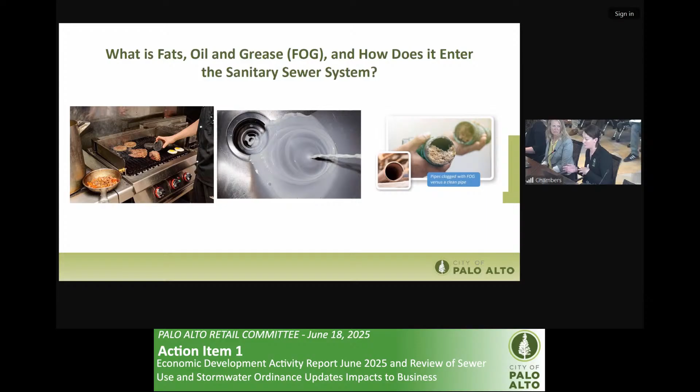Okay, so why do we care and how do we manage it? We care, first and foremost, for the businesses—FOG can really cause backups, it can corrode pipes, it's a very corrosive material when it sits for a while, and it can interrupt business by causing those backups. You might have your toilets overflow, you have to call the plumber, it smells bad—you don't want to experience that. So we're trying to help mitigate that.

Again, if it makes its way out into the city right of way through a sanitary sewer overflow, or if those waste oil bins have drippings, it can be a public health problem and a public nuisance, and it can also attract rodents. So we're trying to address those issues and concerns of the businesses and residents. Bigger picture, those sanitary sewer overflows can make their way into our storm drain system, which goes untreated to our creeks and bay, and can cause damage to aquatic life if not managed. And again, we have Bay Area regional stormwater and wastewater permits that we have to comply with as well.

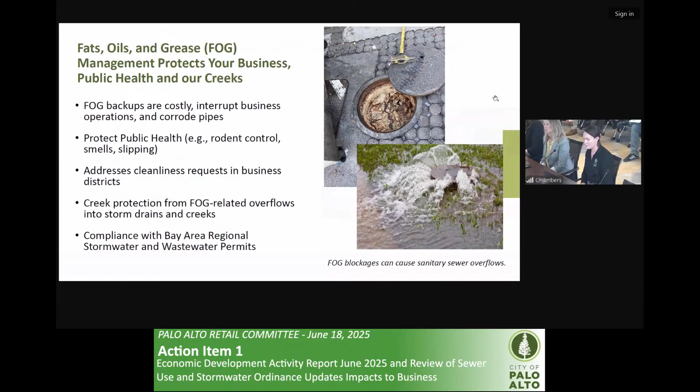So I'm going to briefly go over some major changes. There's also some minor changes. Everything can be found again at that website, and there'll be a QR code link as well for that.

So one of the major changes will be the actual grease control device, the grease interceptor specifications. The first one being the construction material of those devices themselves. I mentioned before that it's a very corrosive environment, so we want them to now be constructed of things like polyplastic, fiberglass, corrosion resistant materials.

The sizing, we want to now take into account the type of cuisine, how many meals you serve, because that affects the output of your FOG.

And then we're adding more connected fixtures, because we know through inspections, and I worked in restaurants for a long time, sometimes the hand sink isn't always used for washing hands. Sometimes the prep sink that's just for washing lettuce has meat thawing in it. So better to just have most of the fixtures in the kitchen, the prep, and some of the service area just connected.

And then Julie had mentioned the waste fryer oil secondary containment. That's going to be applicable to all restaurants, and I have an extra slide on that in just a few minutes. So we'll go over that in just a minute.

And so we realize that some of these specifications will be harder for certain restaurants. Each place has different needs. And so we have developed an alternate means and methods section where we're just coming up with alternate compliance options and trying to get creative and think outside the box and help businesses come into compliance with these new requirements.

Okay, so who will this affect? So some of these are obvious. A restaurant that's new, it doesn't have a grease control device, they're going to have to follow all of these new requirements. If there's a kitchen remodel, if you're expanding, you're taking over the extra space, maybe you're adding a bar that has a service area, you're serving food there, that may trigger some of the new requirements.

If your grease control device isn't operating properly, we see holes in these things, we see missing parts, things just aren't repairable, then you may be subject to change for that. Or if you're consistently contributing to backups in either your own building or the street itself, the city right of way. But as Julie mentioned, if none of these things apply to you, then you likely will not be affected by any of these changes.

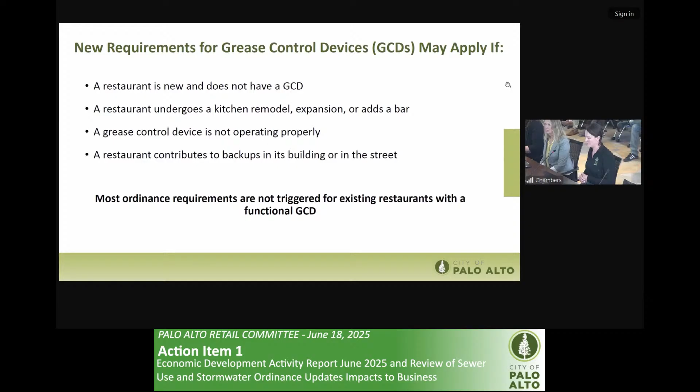We can go to the next slide.

So this is about secondary requirements for those waste fryer oil bins that are stored outside. We have a proposed effective date of January 1st, 2026. We've partnered with the fire department. They have some of their own concerns, and we have our stormwater concerns and public health concerns.

And so we would like for these bins to be stored in some kind of secondary containment. We understand that there's space restrictions in a lot of these areas, so we're going to do a lot of outreach. I've been researching a lot of different types of containment and still working with the fire department to sort of get the details on what is acceptable as secondary containment.

And what I'm finding from my research is that typically it's going to cost in the $1,000 range. It could be a little less, could be a little bit more, but that's about the range that we're finding. And again, we're trying to address concerns from residents and from other businesses, about you've all seen the back alleys at some of these places. They can be very messy, and it attracts rodents. So we're trying to address those concerns while also addressing fire, addressing their concerns, and we're addressing our stormwater concerns as well.

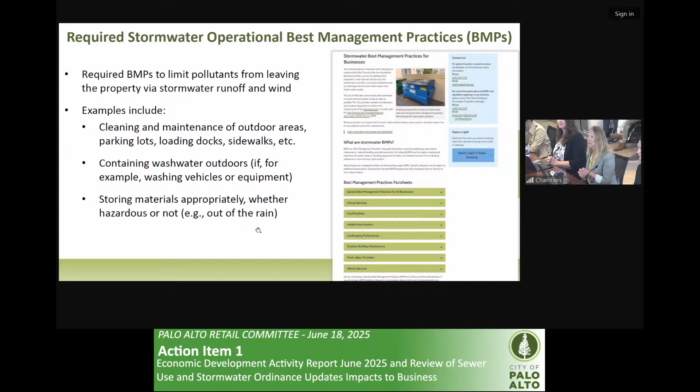So, next steps: we are asking businesses and restaurants to let us know by July 15th if they have questions or comments. We would bring all of this feedback from our business community to you in our staff report when we bring the proposed ordinance changes for all 4 new sections of the ordinance later this summer. Of course, there are 2 readings for ordinances. After the ordinance is adopted, we would do another round of extensive outreach to make sure our community knows about these changes. Ultimately, our job is just to help keep our local creeks and the bay safe, and also protect human health. We're really looking forward to getting these new ordinance requirements adopted. So thank you.

If I could just comment to connect the presentation you just received, and really appreciate the work our Public Works staff has been doing - connecting this item to your discussion last night, in particular on outdoor dining. When I spoke to unintended consequences and things people really don't want to think about when they're enjoying the activation of our car-free streets, this is a perfect example of that, where, as noted, these are important issues to the health, sanitation, and providing a safe environment for our community.

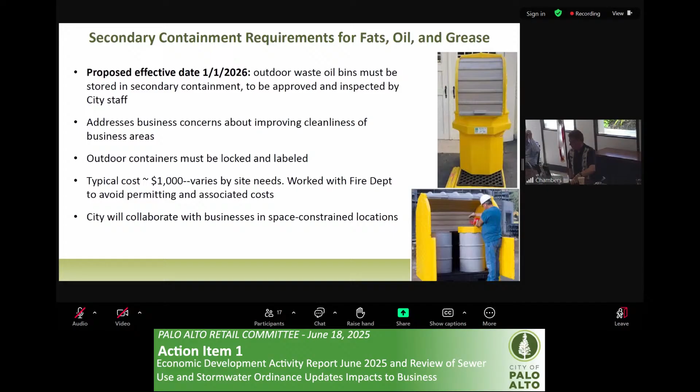Sure, so I'm referring to the alleyways where there needs to be access for emergency vehicles or just regular vehicles. There's already dumpster bins, waste oil bins, cars parking, so kind of considering that those are space constrained. And if we're adding secondary containment, it's going to increase the footprint of that waste oil bin, so we need to think outside the box in those situations.

That'll be a lot of me going out and physically looking, bringing a tape measure and working with the fire department to also make sure that we are in compliance with their regulations, and then working with the businesses. So like Lot A over here, and especially downtown, it's more space constrained, so we're going to have to figure out creative ways to meet this requirement.

And so what happens if there's not enough room? Then what kind of creative ways do you use? So things like putting awnings that are coming out from the building themselves. So instead of having a freestanding device like the one pictured, you might keep it where it is already, but have an awning come out to cover that.

They even make really heavy duty tarps that are fitted to the waste oil bin itself that'll help with stormwater runoff and things like that. So there's a lot of things on the market where it would only increase the footprint by a few inches, and I think that could work in a lot of cases. Or possibly seeing if some of these restaurants can bring their waste oil bins inside, or maybe have smaller waste oil bins that they can just get pumped more frequently, or again bring it inside, and that sort of takes away that whole issue.

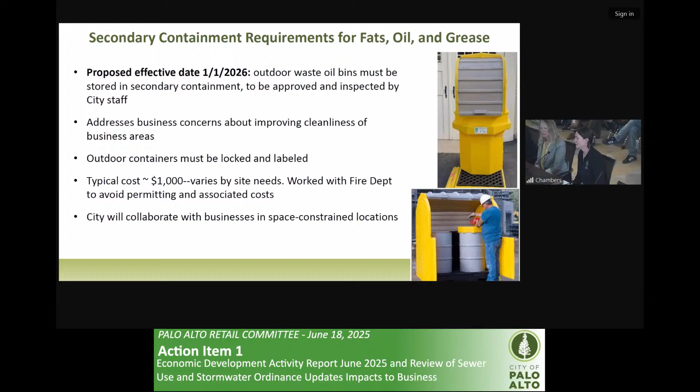It's not, they don't have a local stormwater, storm drain system. That's not treated, right? This one is actually interesting, and I didn't touch on this when it came to the slide initiative.

So we do have a really strict requirement to reduce our trash entering the storm drain system by 100% this year, and we're on track to meet that requirement by July. The way we're going to meet that is by installing small trash capture devices, those baskets we talked about earlier. So in addition to the normal street sweeping, and some businesses taking ownership, we also have these trash capture devices installed to keep that from entering the storm drain.

In public drains. Yes. It depends on the location. Some of those may only be serviced a couple times a year depending on where they're at, and some may be serviced much more frequently.

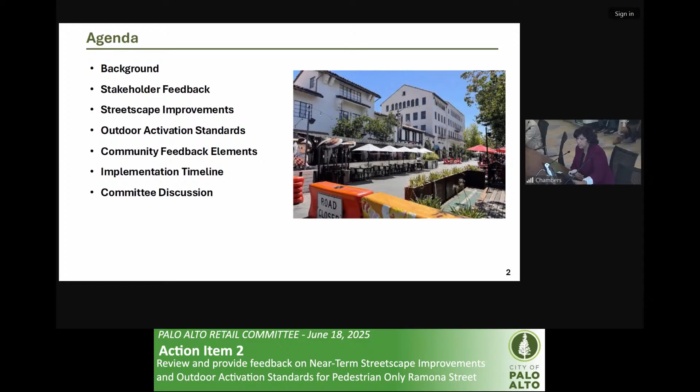An overview of the agenda: we'll do a brief background, talk about what we heard from the stakeholders, and then Hannah will present the streetscape improvements as well as the outdoor activation standards. Since we have not had the community meeting yet, we will discuss what we are looking to get in terms of specific feedback from the community meeting, which will be held next month. Then we'll go over an implementation timeline and open it up for public comment and committee discussion.

As I mentioned, the scope of improvements is fairly limited in this first phase, which is near-term improvements. So we're really looking at pretty modest streetscape improvements as well as the outdoor activation standards, primarily dining and retail standards. There could be a potential phase 2 in the future if there's buy-in and funding identified, which could reimagine the street, maybe looking at a no-curb street, gateway elements, but again, not part of today's discussion.

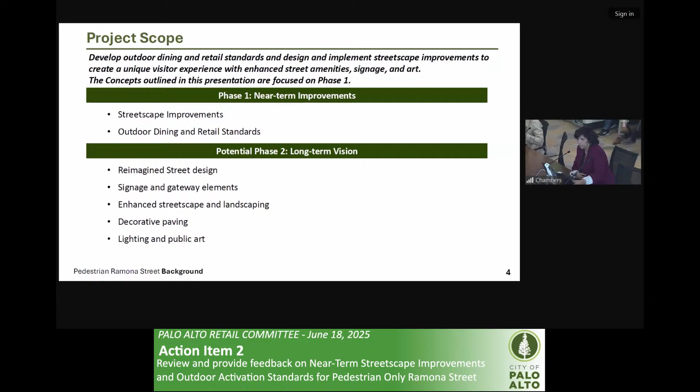As all of you are aware, the Ramona Street Architectural District was listed on the National Register of Historic Places in February 1986. It offers some great examples of Spanish Revival and Monterey Colonial styles that were introduced by renowned architects Pedro de Lemos and Birge Clark. The buildings were primarily built between 1925 and 1938. There was one, the Cardinal Hotel, that was built in 1924, but that's a neoclassical style.

As you're very familiar with this street, the character of this district really features handcrafted pavements, great glazing for the pavers, courtyard spaces that go in and out of the public realm. There are a lot of arcades and courtyards that invite you in, a lot of wrought iron work with the balconies, and decorative tiles that evoke images of Spanish villages.

This is important to keep in mind as we look at the outdoor activation standards, because for the ongoing Parklet program, we allowed a lot of flexibility in terms of design expression, really allowing restaurants to express themselves through creative designs. In this case, because of the historic nature and the very limited space, the existing architecture really dictates what we'd want to have here based on what we're recommending today, and we look forward to hearing your feedback.

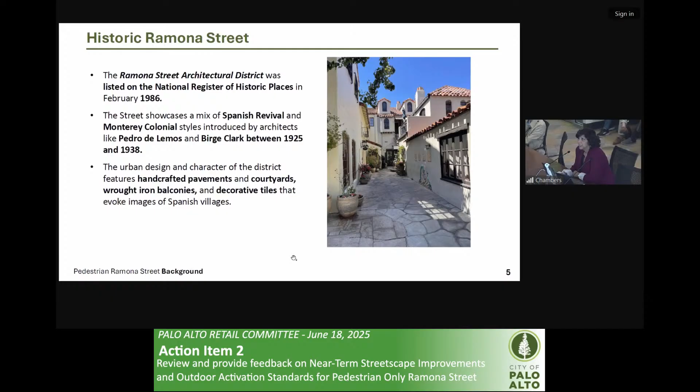In late February this year, we had a meeting where we invited our downtown stakeholder working group that advises us on various things related to downtown, including the University Avenue project. We also specifically invited the Ramona Street stakeholders to this meeting. We solicited input on a variety of things, and we followed up with a survey, which allowed people to give us more detailed feedback and some time to think about it. The survey was focused on streetscape design, wayfinding, and outdoor activation, including wayfinding signage.

Overall, there was very strong consensus to reflect the Spanish Revival style, and because of that, much more openness to having greater design uniformity and more prescriptive design, so that there is a more cohesive look within this historic district.

Really, people wanted to make sure we did not detract from the existing architecture. It's something that draws a lot of visitors, and people felt like whatever we did on this street should complement and not take away from the existing architecture.

We asked for feedback on streetscape elements like the paving, and there was a strong preference for stamped and colored asphalt over standard asphalt or painting over the asphalt.

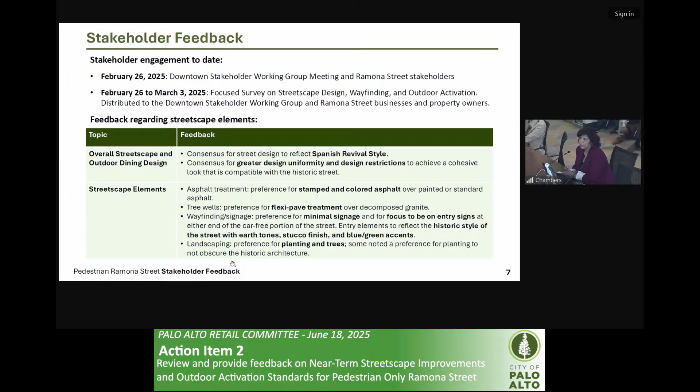Then we talked about elements we would include in the outdoor activation standards, and again a preference in terms of edge treatment to divide up the spaces using wrought iron or planters. This is one unique one here.

I heard your discussion yesterday on Cal Ave. In this case, there was a strong preference for no permanent roof structures, umbrellas only to provide shade. Part of this is the fact that it's a small, historic street. If we did roof structures, we would have to get a lot more prescriptive. Right now on the street, there's only one restaurant that has a roof structure—everybody else has umbrellas.

Furnishing had some mixed feedback about being flexible versus prescriptive. The compromise in our recommendations has been to ask for high quality, commercial grade furniture that can be well maintained—no plastic, etc.—but to allow a little more flexibility in terms of type and color of furniture.

Platform. This is where it deviates from the ongoing Parklet program. Because there's sidewalk and arcade space available, we felt we could meet the ADA requirements for dining with seating located in those spaces on the sidewalk or in the arcade, and not have to build up.

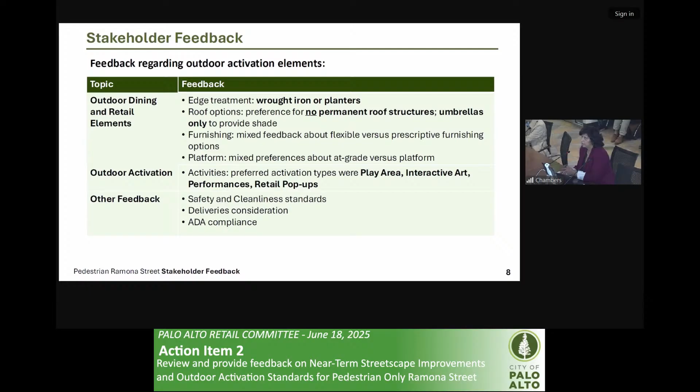There was some other general feedback about making sure we had safety and cleanliness standards incorporated, that we were considering short-term deliveries as well as ADA compliance for not just path of travel, but also for parking. We'll talk about efforts related to that working in parallel with this project.

Next slide, please. I'm going to turn it over to Hannah to walk us through both the improvements and the standards, and then we'll come back with an implementation timeline discussion.

Thanks, Ashwini. So based on the community's feedback and the historic elements of the street, the streetscape design is based on a color scheme and material quality that complements the Spanish Revival architecture of the street. The color scheme is designed with warm, earthy tones in mind, as well as green and blue accents to match the existing tile work throughout the street.

The materials are inspired by the terracotta tiles, cobblestones, and decorative ceramics, as well as the stucco walls and the ornamental wrought iron work featured throughout the street. Next slide.

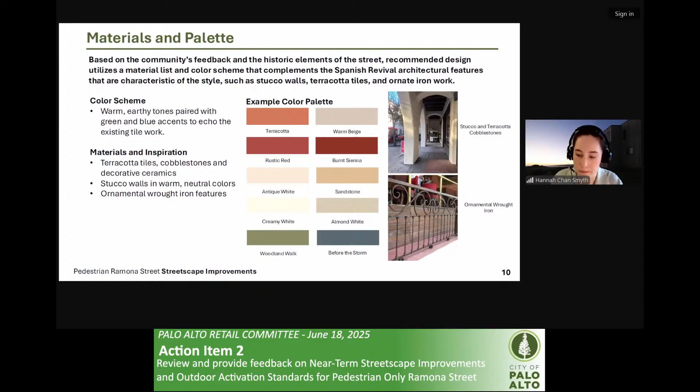So going over some of the streetscape improvements planned for phase 1. The first is the resurfacing of Ramona Street between Hamilton and University Avenue with stamped and colored asphalt to be used in the pedestrian only portion of the street, including the center, fire access, and creating crosswalks from sidewalk to sidewalk across the street. The asphalt stamp and color can be done in a variety of patterns in almost any color.

On the left-hand side of this slide are 2 examples of a stamped and colored asphalt path. In the middle, you see existing stone pavers that are seen around the arcades and courtyards around Ramona Street. And on the far right are some examples of the patterns that can be done.

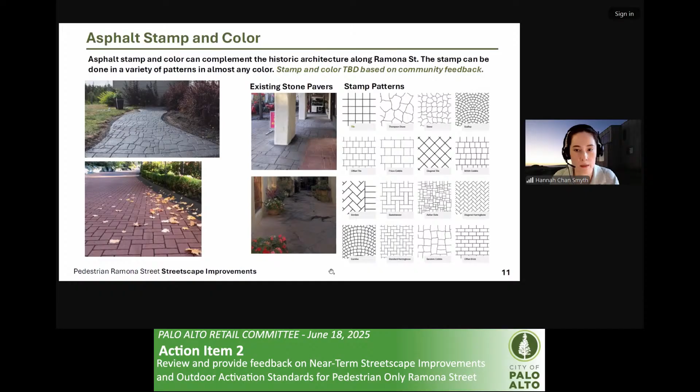The second improvement is custom decorative planters to be installed at either end of the street, and we'll go into some of the options later on in the slide.

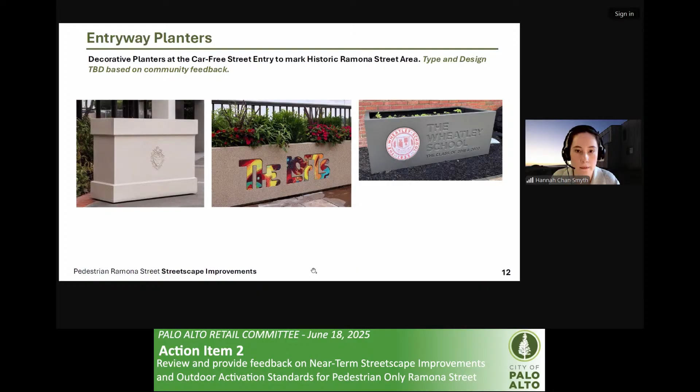Other streetscape improvements include providing Flexi-Pave tree well treatments, as Ashwini mentioned, and replacing the temporary vehicle barriers with permanent retractable or movable barriers, as well as repairing the sidewalk where necessary and installing curb ramps to provide accessible paths for pedestrians.

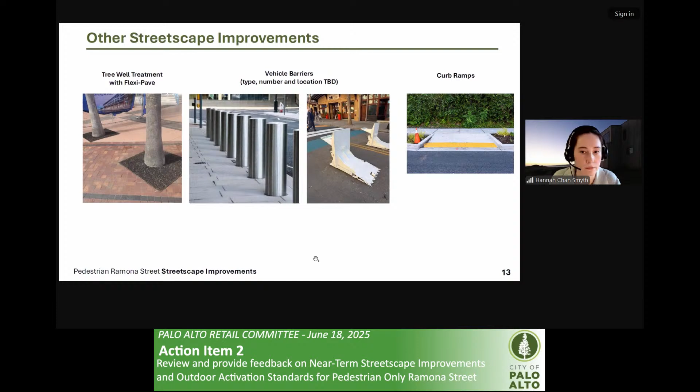Through a separate but related project, staff will be updating traffic signage at the University Avenue and Ramona intersection to indicate that a portion of the street is closed to vehicular traffic. The project will include replacing signage on existing poles and installing a new pole with a no outlet sign.

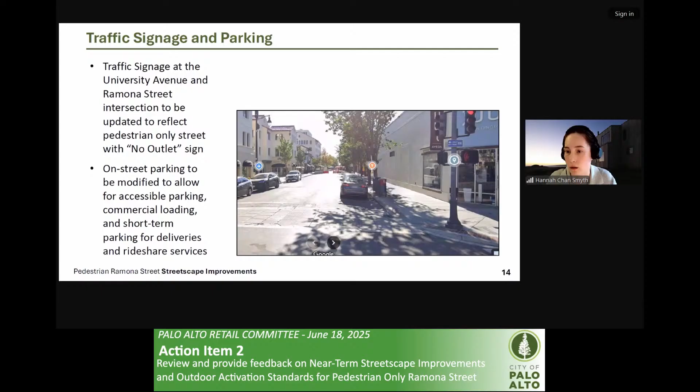Staff are also looking at reconfiguring parking to include accessible parking, commercial loading, short-term parking, and a red curb so that there is space for cars to turn around.

The full set of draft activation standards are provided on packet page 18 and onwards. As Ashwini mentioned, the outdoor activation standards draw upon the city's ongoing parklet program, but they have been refined to respond to the unique conditions of the historic street and the pedestrian-only environment that will be the car-free Ramona Street.

So car-free Ramona Street will consist of 4 street zones. First is the arcade shown in pink, which is an extension of the private buildings and includes entryways and recesses set back from the building frontage. Second is the activation zone shown in blue, which is the area designated for outdoor dining, retail merchandise, and non-commercial activity, located adjacent to the building and then on the first portion of the street. Third is the pedestrian zone, which is an 8-foot zone to provide circulation and access. And lastly is the fire access lane at the center of the street to provide emergency access.

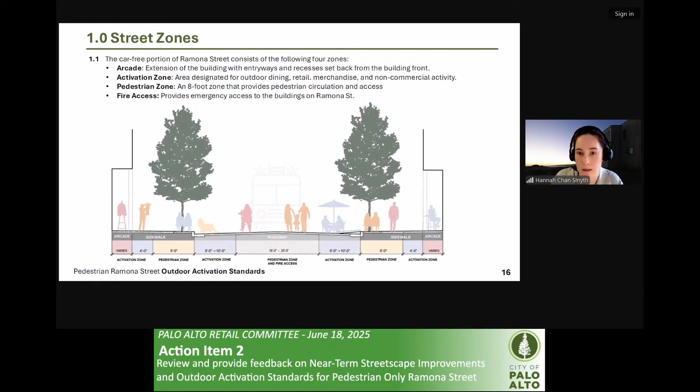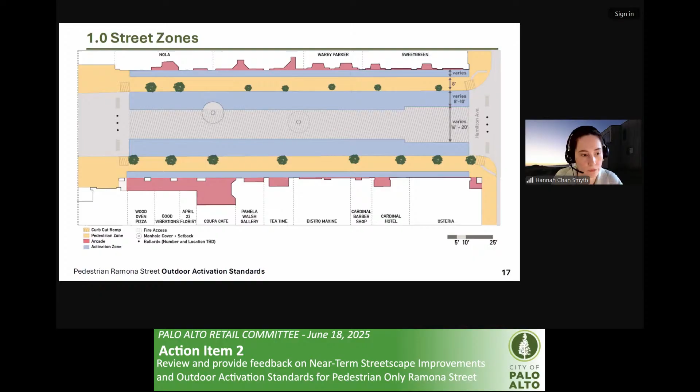Businesses are required to locate their outdoor activation space directly in front of their storefront. Activation is permitted in the arcade in pink and the activation zone in blue. Of course, activation shall not obstruct the pedestrian path, the fire access, ADA ramps, or setbacks, which we'll talk about. And consistent with council direction for the ongoing parklet program in January, any outdoor activation that extends beyond the applicant's storefront requires a letter of consent from the neighboring ground floor tenants.

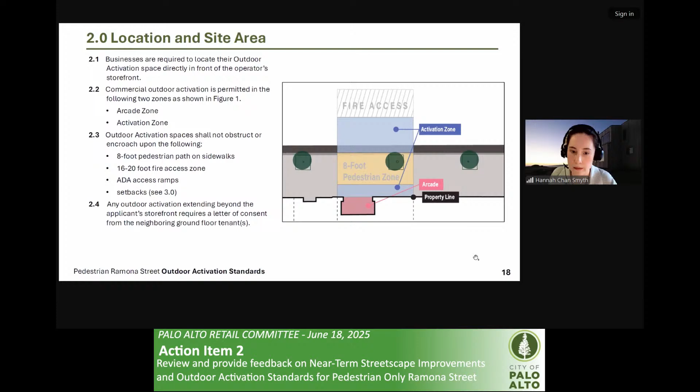Outdoor activations shall be set back from manhole covers and shall not obstruct storm drain catch basins or utilities.

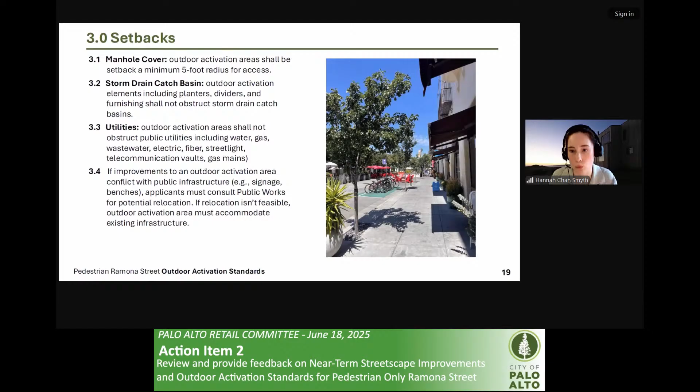Permitted activities, as Ashwini kind of mentioned already, include dining, retail, and non-commercial activities with the appropriate approvals in coordination with the city.

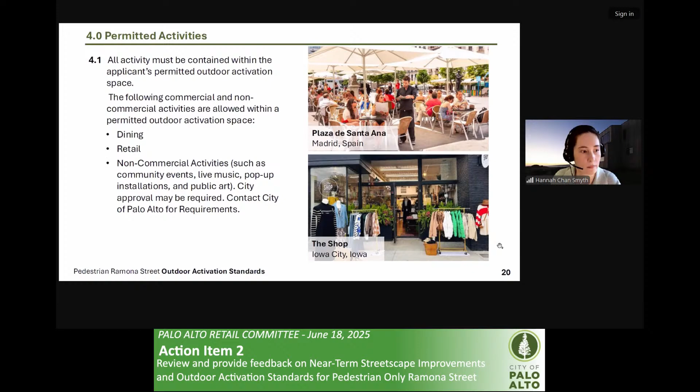Non-dining uses are not required to have planters, so they can be open to pedestrians from both the fire lane and the sidewalk.

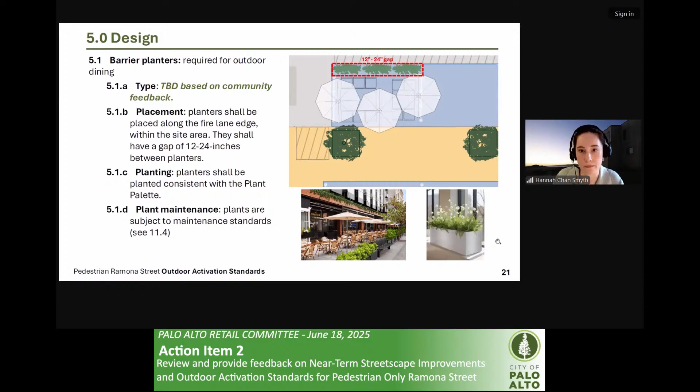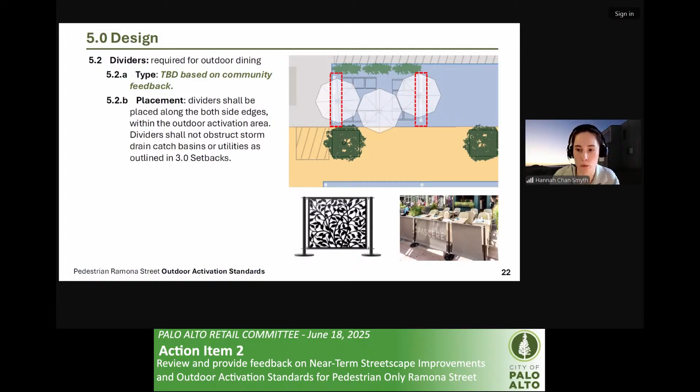Dividers will be required on either edge of the activation area to delineate the privately operated space. As you can see, highlighted in red, we have opted for movable panel dividers and have curated two options, which we'll go into for community feedback.

Umbrellas will be permitted to provide shade, and based on the community's feedback and the desire to be complementary to the historic street, permanent roof or permanent structures will not be permitted.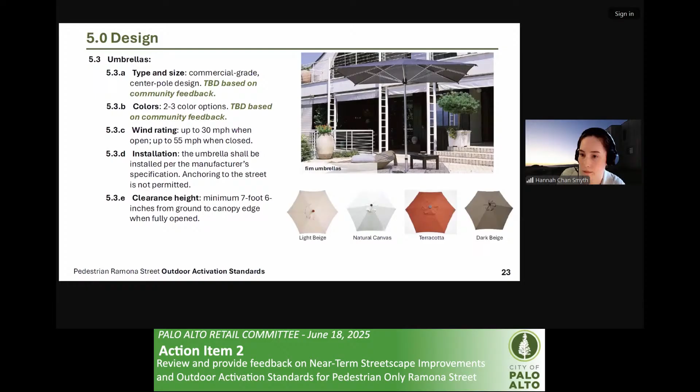The standards recommend that outdoor seating should be arranged in line with the slope of the street, as you can see in the image on the slide. Furnishing shall be high quality, durable, outdoor rated, non-reflective—for example, no plastic furniture. Seating must also comply with ADA requirements.

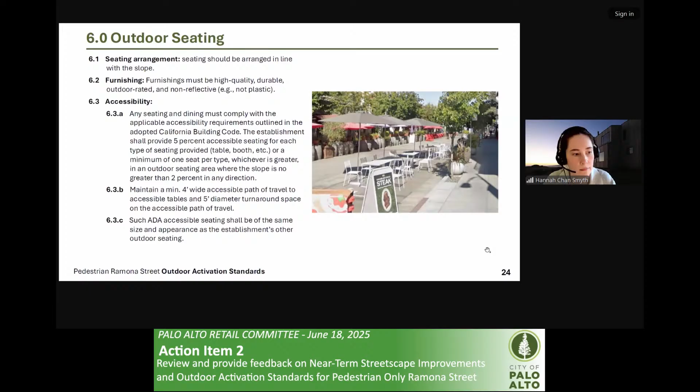Additional outdoor activation standards apply and are included in the full standards in the packet, but some highlights include lighting—only solar powered string lights and table lights will be permitted. Heating, propane heaters would be permitted with a hazmat permit, and no electrical heaters would be permitted, as no permanent electricity can be brought to the outdoor activation area.

Branding and signage is consistent with the ongoing program, so one sign per business and not permitted on umbrellas, awnings, or vertical screens. There will be waste management standards and operational standards, including site maintenance, plant and planter maintenance, and outdoor dining and retail operation standards. Restaurants will be responsible to comply with the FOG program requirements, including grease control device system maintenance standards. Outdoor activation areas will also be subject to fees—permit, license fees, renewal, and refundable deposit—which are outlined in your packet.

Just to highlight, the only standards required for all outdoor activation areas are dividers, site maintenance, and waste management standards. Outdoor dining must also comply with the barrier, planters, and ADA standards, and the rest would be optional.

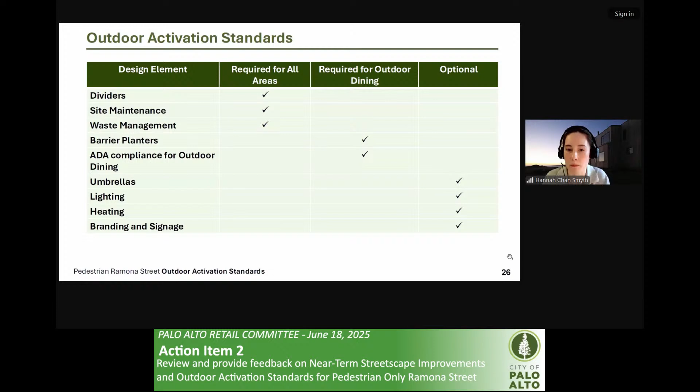In summary, the key differences between the proposed Ramona outdoor activation standards and the ongoing program are that no permanent roof structures or sidewalls would be permitted. Outdoor activation is at grade, so no platforms, and no vehicular setbacks or vehicle safety measures will be required, as it'll be in a pedestrian-only street.

No setbacks between outdoor activation zones would be required, because without permanent roof structures, access can be easily provided from the fire emergency access lane to the buildings. No electrical connections are allowed, which eliminates the ability for electrical heaters or permanent lighting, and we are looking to have more restrictive design requirements. I did want to highlight that, consistent with the ongoing program, letter of consent requirements will apply on Ramona Street as well.

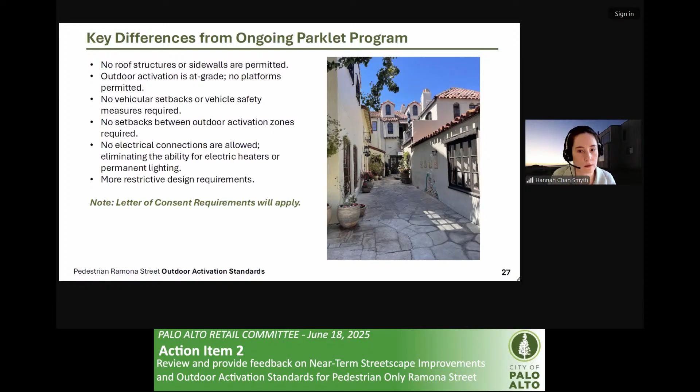We are looking forward to looping back with the community next month and seeking feedback to help us finalize the outdoor dining standards, including the streetscape asphalt stamp and color.

Here you can see a couple of options of combinations. Options one and two are inspired by existing paving within the historic area, but classic herringbone or brick stamp options are available as well.

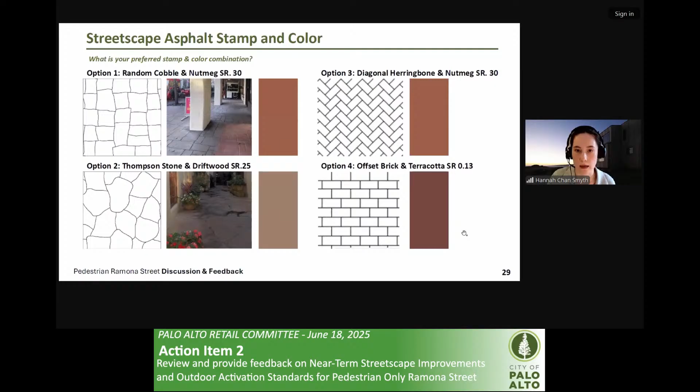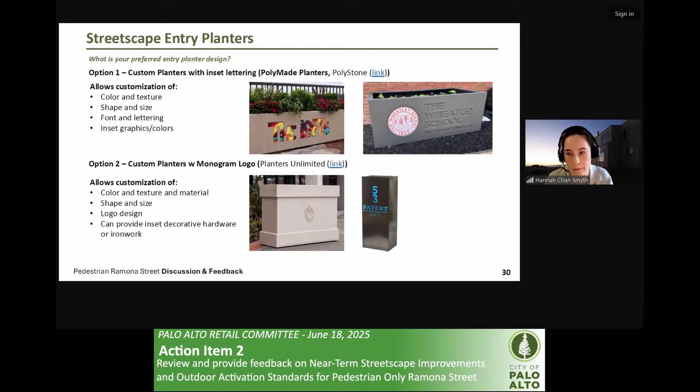We're also hoping to get feedback on preferred entry planter designs. Two options we've identified are custom planters with inset lettering, which would allow customization of color, texture, shape, size, font, lettering, and inset graphics as well. Option two is a bit more minimal, with planters featuring a custom logo and the option to provide inset decorative hardware or ironwork.

For the barrier planters for outdoor dining, there are two options we've identified and are seeking feedback on. The first is to require low planters, 18 to 24 inches, with taller grasses and planting. This option would create greater visibility and openness by maintaining sight lines across the street. The outdoor dining areas would feel more connected and integrated with the street, allow for more greenery and taller plants, and these shorter planters are also slightly more cost effective.

The second option would be to have taller planters with low plants. This option would create a greater sense of separation from the surrounding area, offer a little bit of wind buffering and privacy, and create a more enclosed dining atmosphere.

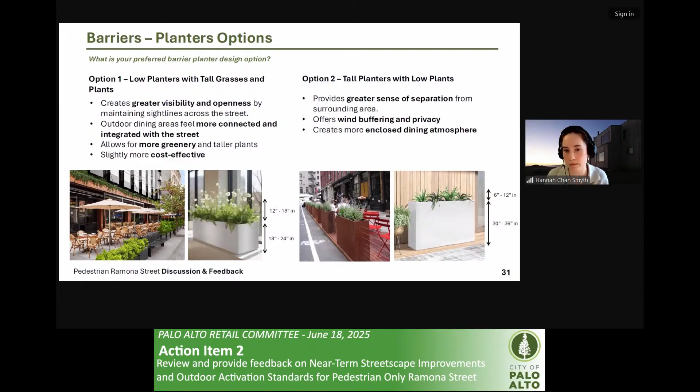For each planter barrier option, we've also put together a plant palette. Both plant palettes are made up of plants that require very low water needs, and maintenance standards would also apply. We'll seek feedback from the community on whether there are other plants desired for the street.

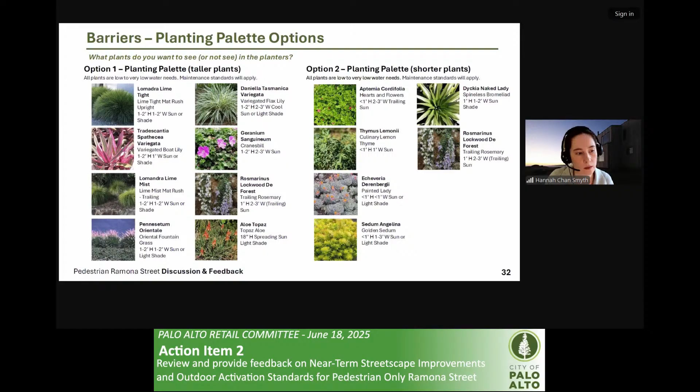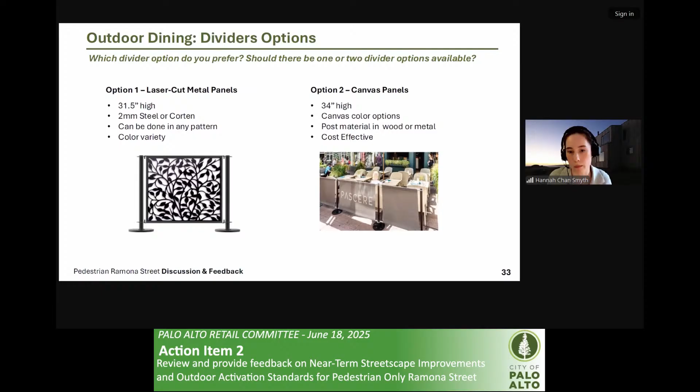From the community, we're specifically asking if there is a preference, if there should only be one divider option, or if both could be available. Next slide. Lastly is umbrellas, and we're seeking feedback on preferred colors, how many colors should be provided, and preferred size and shape.

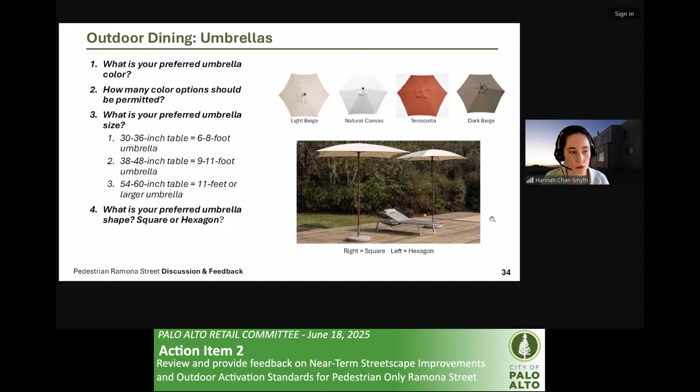So with that, I'm going to pass it back to Ashwini to go over implementation. Thanks, Hannah. If we could go to the next slide.

So this is the implementation timeline. As you can see, it's pretty accelerated to get all of the improvements completed by the end of this year, and we may have to adjust based on stakeholder feedback as well as coordination with the public art program. So we may need to adjust this, just prefacing that. As I mentioned, we are planning for a community meeting in July and then council consideration in August. Again, if needed, we can adjust that.

I'd just like to make one note: the parklets on Ramona have been operating first under the temporary parklet program for several years, and then just the cleanliness and maintenance standards of the ongoing program have applied. So they have not been asked to make any changes or modify their parklets up till now.

So this is the one where it would be new standards, and we're going to leverage the street resurfacing project that Public Works does on an annual basis. They would be similar to what happened last year with the parklets. They would be required to demolish the existing parklets or outdoor dining areas, and then all future dining and retail areas would need to comply with the adopted outdoor activation standards.

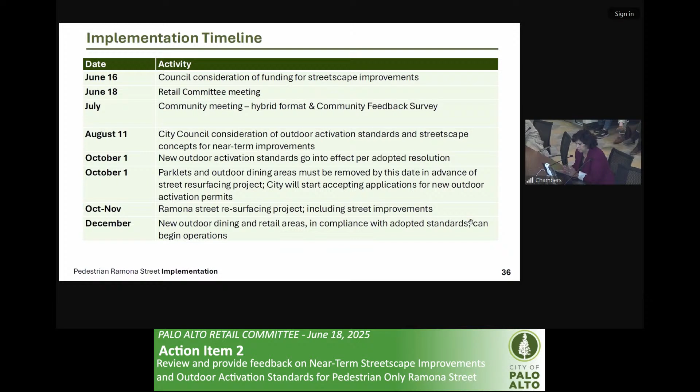So with that, I know we're running late, so we'll stop there and happy to answer questions. Thank you. Okay, we'll go to public comment unless you have any questions. Okay.

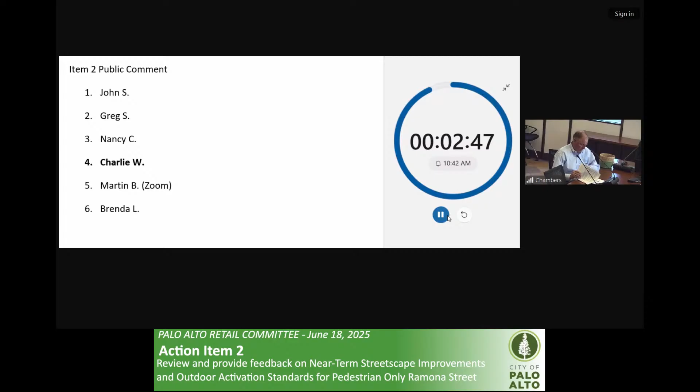Good morning, thank you. The feedback I've had over the last few weeks is what you just heard from the speakers before me, so I won't repeat that, but a few areas I do want to focus on. One is the project scope is to develop outdoor dining and retail standards and design and implement streetscape improvements to create a unique visitor experience. But without having year-round dining, and with prohibiting the structures that would promote outdoor dining, can a plan create that unique visitor experience and make it a year-round experience? As was said before me, it's difficult to have year-round with just the umbrellas alone.

So that's part one. Part two is that the businesses are really concerned about the money they have put into their current outdoor dining, and this will now have to all go away at the end of this year, and then be rebuilt. So there's considerable expense for them to go through this. And then the last piece, as was said, also the October through November period, where they would be closed for outdoor dining, is difficult because that's a key time. So I think, how can a plan be developed that makes that unique outdoor dining experience, but year round? And then how can we work together to make sure business is not disrupted in some of their key months? So thank you.

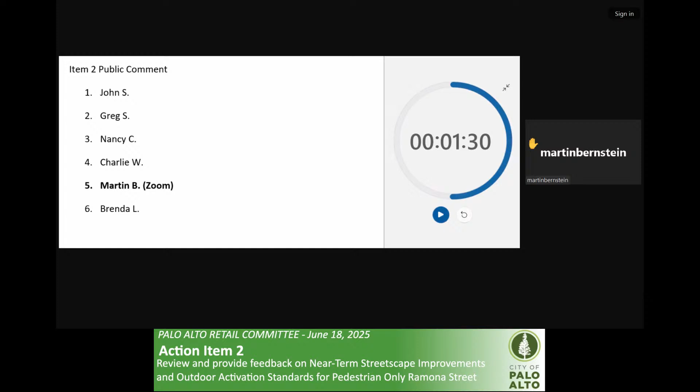Thank you. Hit the microphone, please. Thank you for the opportunity.

My name's Brenda, and I'm here representing Osteria Toscana as an owner. First of all, I'm very excited about all of the aesthetic improvements to keep in line with the historical nature of Ramona. I think all of us business owners on Ramona truly are on the same page there and want to honor that. There were a few concerns that were brought up that I just want to back.

John was mentioning if we're going to do this right, and I'm kind of echoing that, in agreement with that, because I feel like to make another change until we really have this plan very well thought out would be a mistake. I do think that we have had one meeting, as far as I'm aware, on Ramona Street. Maybe it would just take a few more conversations to really make sure all these decisions, which are beautiful and on paper look great, but just making sure we execute things that really make sense for the long run.

I want to raise two other concerns. One is the timeline that Greg talked about. I don't think October is the best month to start this. We've waited this long, it's gone back and forth for 5 years, so why not have a real plan with a timeline that makes sense, such as January or February when restaurants are slow? Or why not wait until we really know exactly what we're doing? Putting restaurant owners through more changes and tearing things down just doesn't make sense.

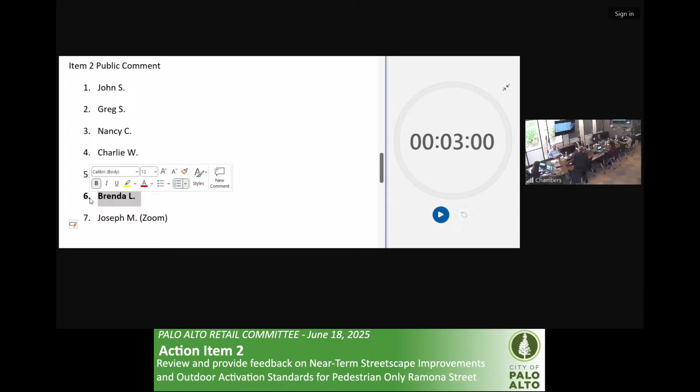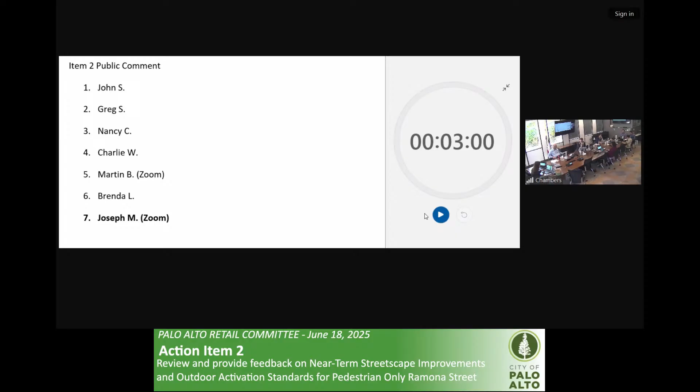Hi, this is Joe Martinetti with Ventana Property Services. We manage a number of buildings along the Ramona corridor we're talking about this morning, and I appreciate the opportunity to give feedback to the city and city council. For brevity, I support all the comments John Shenk of Thoits Brothers made this morning, and we encourage the city to look at the overall program in terms of how Ramona Street will be kept and maintained, and the services it will need. It's a fairly complex problem to maintain cleanliness, sanitation, and good health and safety for people walking in and out of the street.

One thing regarding replacement of sidewalks - many of these old historical buildings allow the lower level to extend out into the sidewalk area, so you have offices, basements, and service areas physically below the sidewalks on Ramona. Sweetgreen, Warby Parker, and where the old Pro store was all have lower structures extending out to the curb line. So when we talk about replacing sidewalks, I want to caution the city that there are expensive waterproofing systems recently installed in those locations, and breaking up concrete damages the waterproofing membranes protecting those occupied areas below the sidewalk. Sidewalk replacement, while it may seem simple on the surface, is far more complicated.

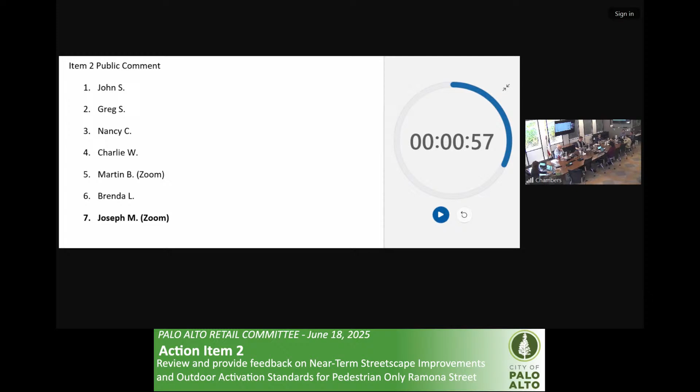Okay, thank you. Chair, if I could, I'd like to comment following this series of speakers, to express appreciation on behalf of staff for all of you coming out and sharing your thoughts with us. As Ashwini pointed out, this is clearly a work in progress, and in particular with the schedule, we'll move the schedule as necessary to get this right. Ramona is really a special place, a unique and somewhat discreet location, such that we could have so many of the primary stakeholders here, as an example, able to get in a room and talk through the issues. We look forward to working with everyone to ensure we get this right. Thank you, those are very good comments.